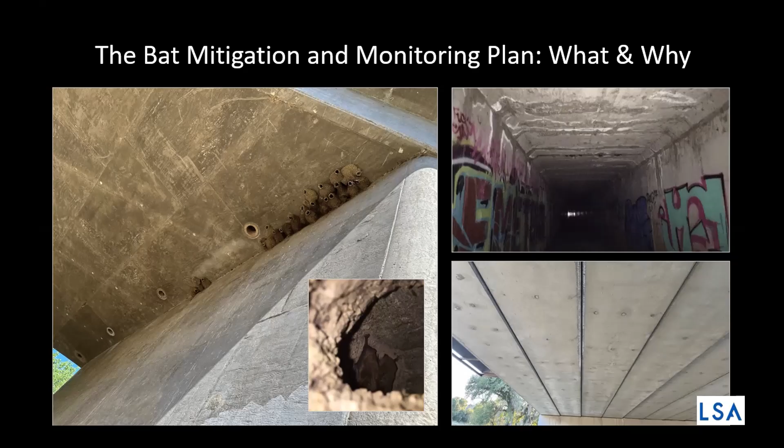So this is not inclusive of all parts of bridges and culverts that bats can use. This is just a representative sampling because I've got a lot to cover, but it gives you an idea of where bats might be in bridges. And so if you need to do construction on these structures, obviously you need to figure out how to do that without harming the bats. And so why do you want to do that? Well, there are environmental regulations and commitments you might have, depending on where you are. Those vary. In California, we have regulations that protect individual bats as well as colonies of bats, particularly maternity colonies of bats. There's also environmental commitments. There may not be laws, but the Federal Highway Administration and Caltrans have environmental stewardship standards.

Also, not just because you have to do it, but also loss of roosting habitat is a threat for many bat species. Bats are declining worldwide, and roosting habitat is one of the big reasons. And then also something to consider is there could be other impacts to bats, cumulative impacts from multiple construction projects. There could be indirect impacts like noise and light that could affect bats as well. So we need to take these things into consideration.

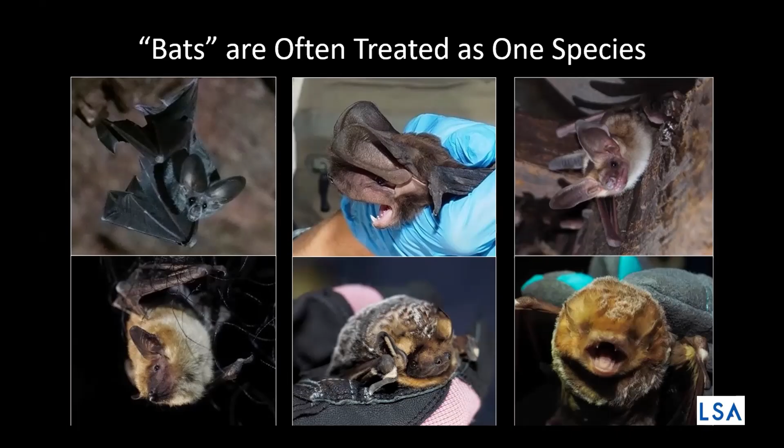Another thing to remember that's really important when looking at bat use of bridges and other parts of the landscape is that bats are not one monolith, right? They're actually quite variable in their ecology and their natural history. And so when you're going to look at impacts to bats from a project, you need to consider that not only are not all the bridges the same, but not all the bats are the same. And how they're using the structures is not necessarily the same. While some of these species in this picture don't use bridges, I just wanted to show you six species in California and how different they even just look, right? So they don't all look the same, they don't all act the same. So we can't be looking at this as a monolith.

So why would we want to create these mitigation and monitoring plans? This is going to have site-specific guidance, which will help in permit preparation. If your environmental permits have not yet been created, prior to that permit coming out, you'll have very specific guidance to create the permit language. If the permit's already been written for the project, you can refine the existing permit language through this. We often do this. I'll have a permit that has very generic boilerplate language. We'll take that and we'll say, look, the permit says this, but our plan is actually going to recommend this instead, because this is actually more applicable to the bridge, to the type of construction, to the species present, to the use of the bridge by bats.

It also is going to give you extra time. You're going to be doing this well in advance of your project, so you'll be able to incorporate best available knowledge to provide the appropriate roosting habitat or mitigation. Another great thing is it's going to provide clear direction prior to the project being ready to list. One of the big hurdles for the environmental process is that sometimes the project goes to list and the bats haven't been identified or the impacts haven't been adequately assessed, and then it adds to the cost of the project because the contractor bids on the project unaware of what they have to do.

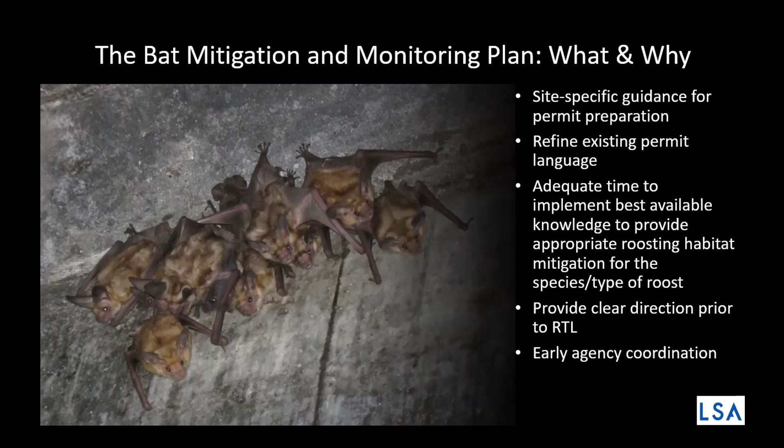When these plans are written well in advance of this, then it goes to listing, the contractor knows what they're bidding on, they know they have to do these things, and it saves money. It also encourages early agency coordination between the DOT, between the wildlife agencies, between the biologists. There's just so many reasons why having these plans is important.

I actually specifically asked a contractor once, what are you doing to the bridge? Oh, we're widening. What else are you doing? We're doing nothing. I was looking at the plans. I was like, you're doing a retrofit, a seismic retrofit. He's like, yeah, so what? I said, you're drilling through the joints, which is where the bats are. He was like, oh yeah. So it's super important to get actual knowledge of what's happening.

And then I had an engineer actually tell me in that meeting, he goes, oh, you know a lot about concrete T-beam bridges for a biologist. And I was like, well, I have to. So, because of idiots. No, I'm just kidding.

But at any rate, then focused surveys, analysis of impacts, what your strategies are going to be to mitigate those impacts. I like to use the word strategy instead of measure, because measure implies something that you can copy and paste. I call them Franken measures. People will sometimes copy and paste totally unrelated things and create bizarre measures that make no sense. I like to call them strategies, because that's really what it is. We're taking these projects on a project by project basis. We're coming up with a strategy to minimize those impacts.

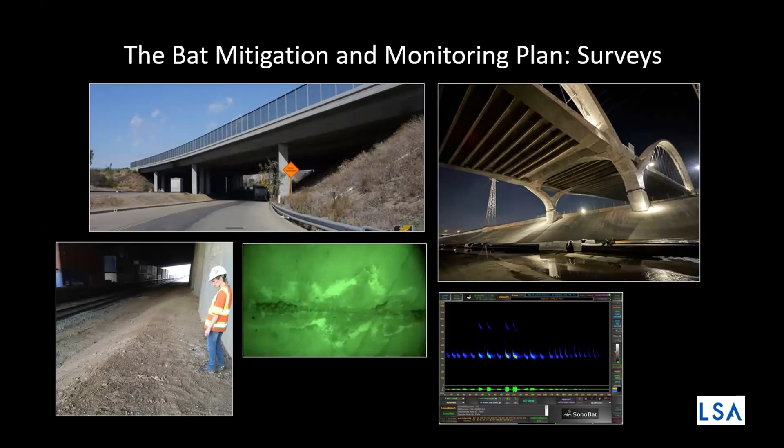And then once you know that you have bats, you know you need to have one of these plans written. You're going to be looking at your impacts analysis. You need to know what species you have. How are they using it? Is it during the summer only? Is it during the summer and the winter? In California, we have year-round use of bridges by bats. Some of the bridges might only be used during one season or another. Some of them might be used year-round. It depends, but we have bats all times of the year in California.

What kind of work are they doing? Is it maintenance, bridge joint stuff? Is it going to be widening the bridge? Is it going to be replacing the bridge? We need to know that. And then of course, those little details like the seismic retrofit. Time of year and duration of construction. Some of these projects are relatively short. They might just be a few months, depending on the nature of the work. Some of them might be a few years if it's a large bridge and they're widening it or replacing it.

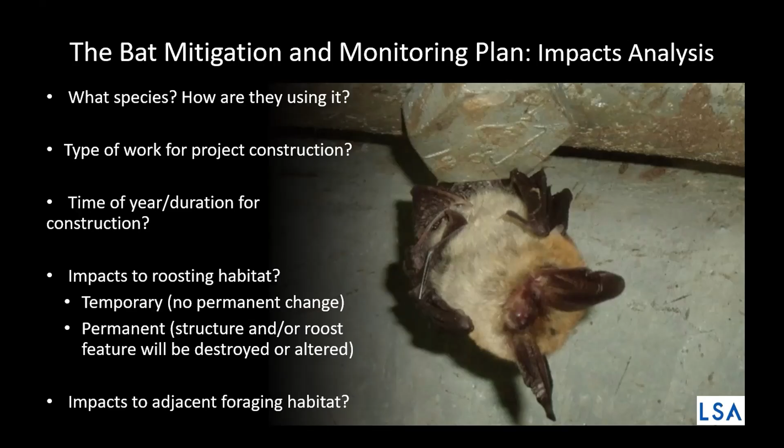What are the impacts to the roosting habitat? So is it temporary? Are they going to be maybe temporarily evicted from their roost and then allowed back in afterwards? Or is it going to be permanent, in which the structure or even just the roost feature might be destroyed or altered? And then something else to consider is actually the impacts to the adjacent foraging habitat. This isn't talked about enough, but you can save the roost, and if the foraging habitat is obliterated, the bats have lost the roost. They can't use it anymore.

And so going into those strategies, one of the main ways I like to do it is to minimize or even avoid the direct and indirect impacts through planning the work outside of when the bats are there.

Now, if the bats are there year round, obviously you can't do that, but then you try to do it at a time when it's going to minimize impacts the most, and avoiding that maternity season is extremely important. You're going to determine if eviction exclusion is necessary, which includes how close the work is to the bats and what season they're going to be doing the work, and if you're evicting them, you need to provide them something else to use. Again, roosts are a very limited resource on the landscape, and you want to avoid net loss of roosting habitat. If you can retain the existing features, that's ideal.

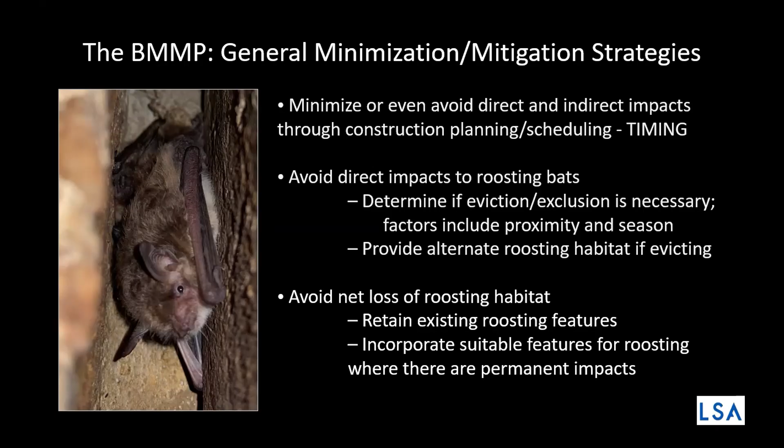If you cannot, you want to provide them something that has demonstrated effectiveness. Putting something that just might work isn't good enough, right? You need to have something that they will actually use. You need to monitor it to make sure that they're using it, because if it doesn't work, it's not mitigation. So just some general strategies.

There could be additional survey work that's mentioned in the plan, recommended, like maybe you need more information about how they're using it in the winter or whatever else. You want to detail seasonal restrictions, like, okay, they can't work from May to October or something like that, or from April to August. You want to think about bird exclusion if they're trying to keep swallows from using the nests. Again, the bats are using the swallow nests, so we want to make sure that takes that into account. They're not just spraying them down and not recognizing the bats could be in there.

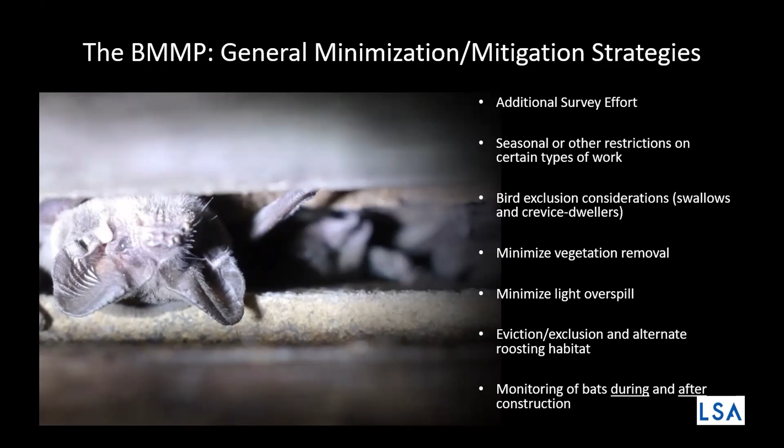Minimizing vegetation removal and light overspill. Talking about eviction exclusion, if it's warranted or not warranted, and how that's going to happen. And also monitoring of bats during and after construction. If we allow the bats to remain in part of the bridge while they're working on another part of the bridge, then we want to check in on those bats and make sure they're okay. After construction, if you've done anything to their habitat, you need to monitor it and make sure that they're able to continue to use their roosts.

And so just to talk about humane eviction exclusion a little bit. It's not always necessary on these projects. There's sort of a knee-jerk reaction like, oh, we have a construction project, let's kick out the bats. There's more and more evidence that this is actually quite a severe impact to the bats, to kick them out of their roost, even if it's for a short time, depending on the nature of the work, right? I mean, if they're blowing up the bridge, you have to kick them out, right? But if they're working adjacent to where the bats are, or like Josie was saying, you might be able to have them in one part, move them over, and then let them work over here. There are different ways to deal with that.

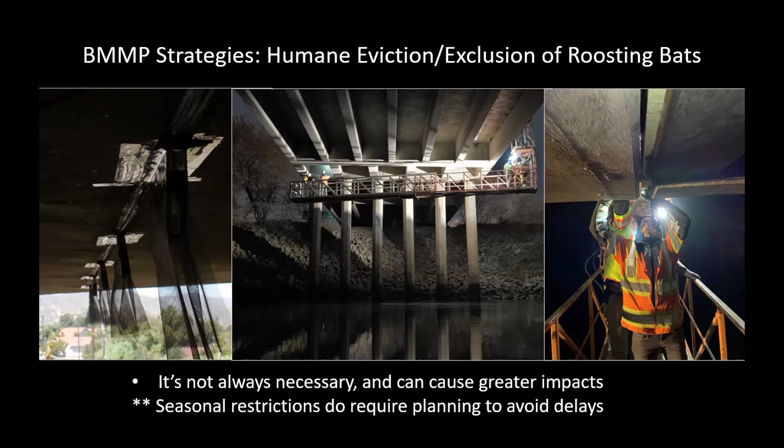But eviction exclusion should not be your knee-jerk reaction, because this can have some severe effects. Oftentimes, like I've had bridges where the bats are only there in the winter, and you just have them work the other time of the year, and then it doesn't affect the bats at all. However, the seasonal restrictions to avoid this do require planning, and that goes back into the early preparation of the plan. It goes into the bidding document, so the contractors are super aware that, hey, you can't work here from this time to this time.

And here's a couple quick examples of some bridges where that happened. The upper left one, they just did it in the fall and winter, and they completely avoided the maternity season, which is when the bats were there. So we didn't have to exclude them. The bats weren't there. Here's another culvert where the duration of work, channel work and a culvert extension, was too long to avoid the maternity season. So we only let them do certain types of things during the maternity season that didn't create a lot of noise. And we also provided alternate roosting habitat bolted on; they were only working at one end, so we put it on this end. The bats moved into this on their own when the construction was happening, had their babies there, everything was fine.

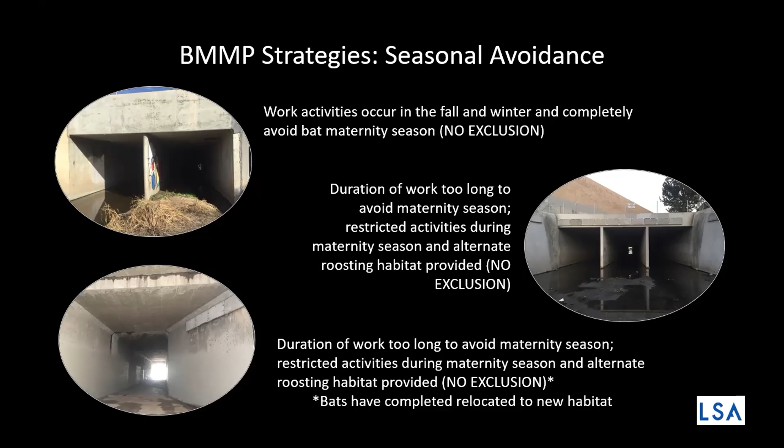And then in this last one, again, they couldn't avoid the maternity season completely, so we didn't let them pile drive, we didn't let them do demo, and they were only working on one end. So we just provided them habitat at the other end. They moved into it themselves, and actually they stayed there after construction was done. So that was great. Another thing we do, like I said, you might have some activities that are happening during the maternity season. We'll monitor the noise. We'll keep an eye on the bats.

Sort of spoiler alert and shameless plug.

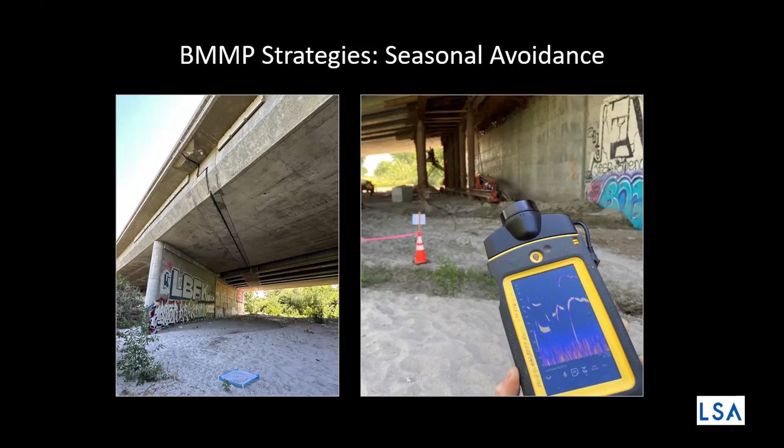I'm working on a noise study right now of construction noise in Caltrans, and I'm hoping in 2 years to provide some cool information about how construction noise is affecting bats. So stay tuned for ICOET 2027.

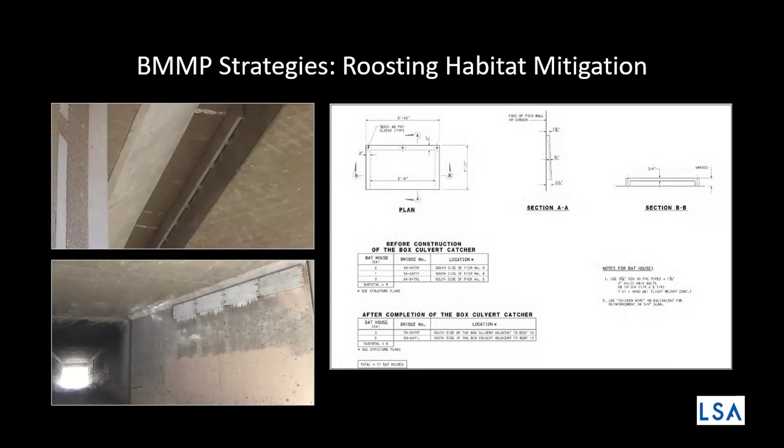Here's some roosting habitat mitigation. Josie showed you some great examples. These are also bolt-on concrete panels that you can bolt onto the sides of the culverts. You can bolt them into the closure pours of bridges. I did a poster at ICOET in 2019 that looked at temperature and how the bats are using these bolt-on panels, and long story short, where you put them on a bridge actually affects the type of use.

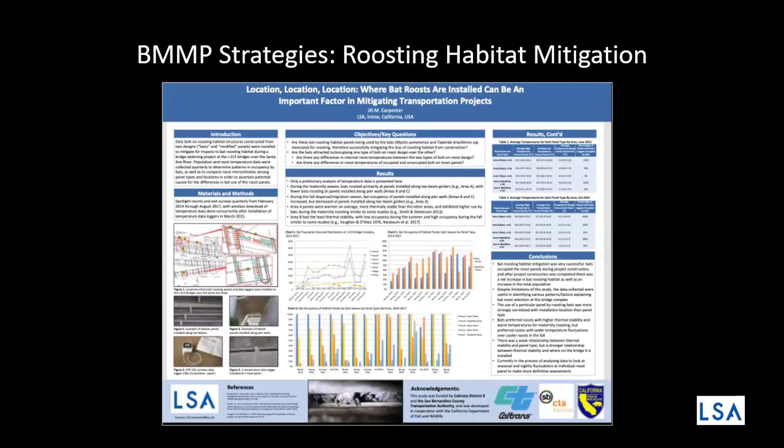So maternity colonies like them up in the girders where it traps heat, it's more stable. The bats in the fall and in the winter tend to like them more in the open where the temperatures are a little bit less stable, but also cooler. I'm happy to send this poster to anyone who wants to see it. Here's building it into the bridge. So when we have a bridge replacement, we can also create bridge plans that build habitat into the bridge.

And so here are the key takeaways. Oh, wow, I went through that really fast. I usually go long, so I was really worried.

So the key takeaway here is, this kicks off the coordination early on, and this is key, right? You don't have the contractor on board yet, but you have the engineers. They know what's happening to these structures. They have a general idea of the schedule, maybe not the order of events, but they know about how long everything's gonna take. So you wanna talk with the engineering team really early on. If you are the engineering team, you're gonna be talking to the biologists early on, figuring out what's happening to this bridge or these bridges. Again, this could be for large projects with multiple bridges or single bridge projects.

And then this provides really clear direction for everyone. Everyone knows what they're getting into. The plan outlines, this is what you're gonna do with this structure. This is the time of year you may or may not be restricted. These are the kinds of things that you can and can't do at these times. But then it still allows for flexibility. I've had some projects where we had this plan and then there was a change in the schedule. The contractor's like, oh, we really need to start pile driving a little earlier to meet this thing.

And I said, look, okay, it's a really long bridge. The bats were in 2 places. So we ended up deciding that we would just have the bats in one area of the bridge so that they had more latitude at the other end. We provided more habitat over by the river, we kicked them out over here, they moved in over there. And then it gave the contractor the option to start at the one abutment, start pile driving and move closer. And by the time they got closer to the bats, they were outside of the maternity season. And so we were able to do that.

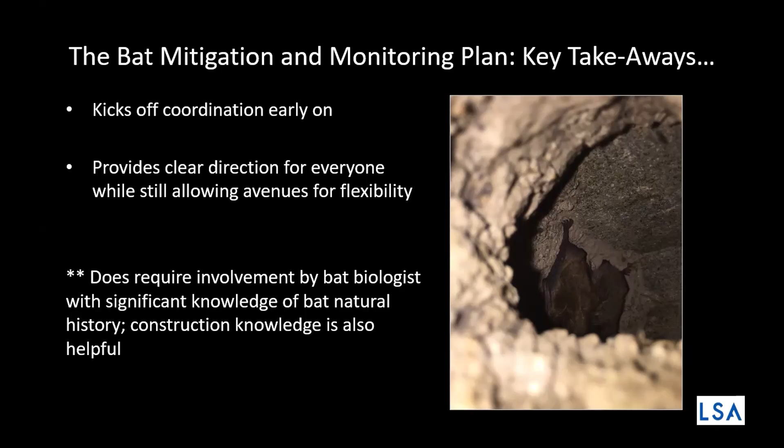So at any rate, that's all I have here. I'm happy to take questions. You can nail me down in the break too. Yeah. Just what we're using for questions. Questions? Yeah. This is a small room.

So it sounds like these management strategies, it seems there's a tie to the permit, because in the state that I'm at, Wyoming, it's a very, very short construction season, so timing stipulations are a non-trivial thing. So for California, are there more teeth to say that you can't do these things, to minimize effects, or is it like Wyoming Game and Fish where it's really not that?

Yeah, it's complicated in California. Wow, this microphone's way different. So we have the California Environmental Quality Act, for those who aren't familiar with CEQA. And so there are more stringent overall environmental regulations in California. Maternity colonies are protected under CEQA as native wildlife nursery sites. And so as part of the law, you have to assess impacts to native wildlife nursery sites, and then you have to mitigate them to be less than significant. And so that's for maternity colonies.